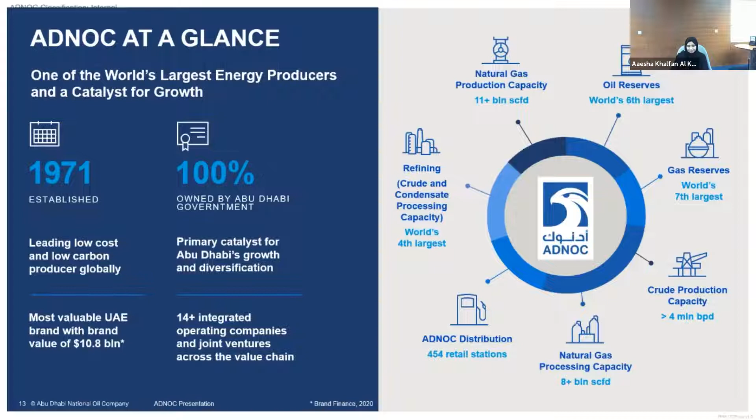So our strategic pillars in ADNOC are people, profitability, and sustainability. So let's talk more about sustainability. In ADNOC we have committed to protect the environment since our operation started back in 1971. So sustainability is a key priority for ADNOC, reflecting the vision of the founding father of the United Arab Emirates, His Highness Sheikh Zayed bin Sultan Al Nahyan, who talked about the need for us to protect and preserve the environment for future generations.

And as per our 2030 sustainability strategy, we are reinforcing our long-standing commitment to environmental stewardship across different pillars and initiatives, such as climate emissions and energy, local environment, economic and social contribution, workforce diversity and development, health, safety and security, and business sustainability as well. And today we'll focus more on emissions.

And in order to mitigate the risk of climate change, we have committed to reduce our greenhouse gas emission intensity by 25%. And this will strengthen our position as one of the least carbon-intensive oil and gas producers in the world. And in ADNOC, we have different initiatives in order to achieve this target. And we are also leveraging technology which will help us to minimize the environmental impact. And we believe that CCUS is one of the key innovative solutions which will help us to mitigate climate change while meeting the global energy demand.

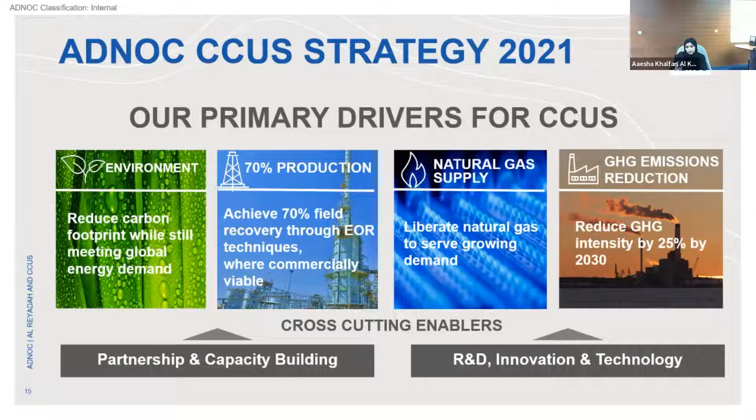And here we are really proud to have Reyadah as one of the top global facilities located here in Abu Dhabi, where this project is the first fully commercial CO2 capture from the iron and steel industry worldwide. And we started this project back in 2016, and we inject the CO2 in our fields, which is the largest CO2 project in the region. And it was successfully operated without any HSE issues.

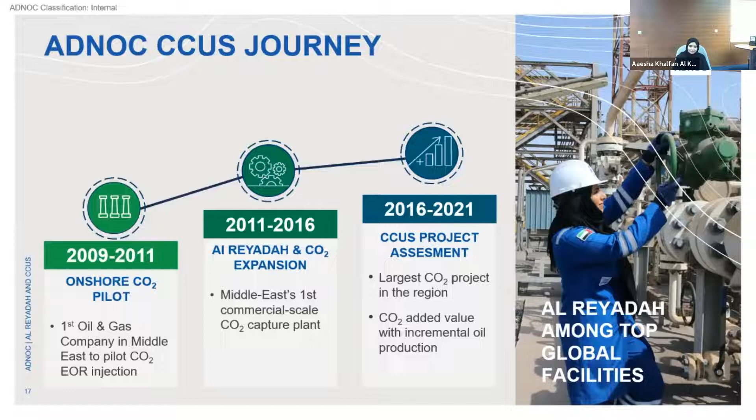So in the upcoming years, ADNOC momentum and investment will continue as per our plan to have different CO2 technology breakthroughs and a partnership strategy. Our priority now is to focus on development of the latest CO2 techniques, which will help us in the end to have an economically viable project and will enable us to optimize the whole cost of the CO2 value chain. And we have a CO2 deployment strategy, and we developed a CO2 master plan and roadmap, which will help us to establish the CO2 value chain, supporting low carbon ammonia and hydrogen. And this supports our strategy in the end.

And we believe in ADNOC that this will be like a game changer in the energy transition. Also, we are developing on top of the classical application different CO2 innovative cost-effective technologies with an EOR application. So this will be the first industry hybrid concept, which will maximize the CO2 added value with the chemical application. And it's expected to deliver higher value for ADNOC business.

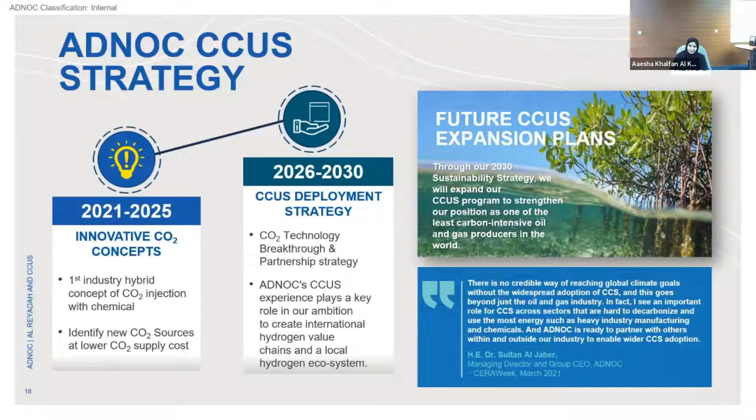Also, we are looking to identify new CO2 sources at a lower cost of supply. And we are doing the screening for different potential sources. And we plan to expand our CCS facility operation by capturing this CO2 from different sources. And now I would like to share with you a video presenting our efforts in this domain. So next, please, which is focusing more about Reyadah, which is our successful story.

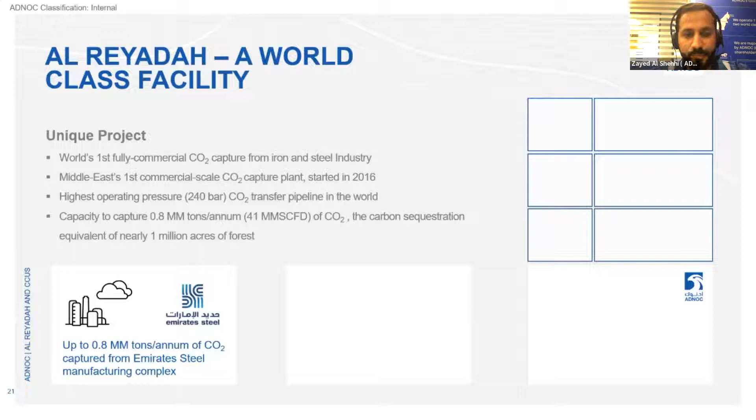This slide illustrates the entire value chain of Reyadah. So it starts with capturing of the CO2 there at Emirates Steel. So instead of being vented to the atmosphere, the wet CO2 would be brought to Reyadah for compression and dehydration purposes. Now our facility consists of the LP compressor and also the HP compressor.

So we are receiving the CO2 at almost atmospheric pressure, and then it will be compressed all the way to 240 bar. Now the final product would be metered, and of course we'll do the quality check, and it's going to be exported through a 43 kilometer pipeline for the enhanced oil recovery in Rumaitha field first, and then in Bab. Next, please.

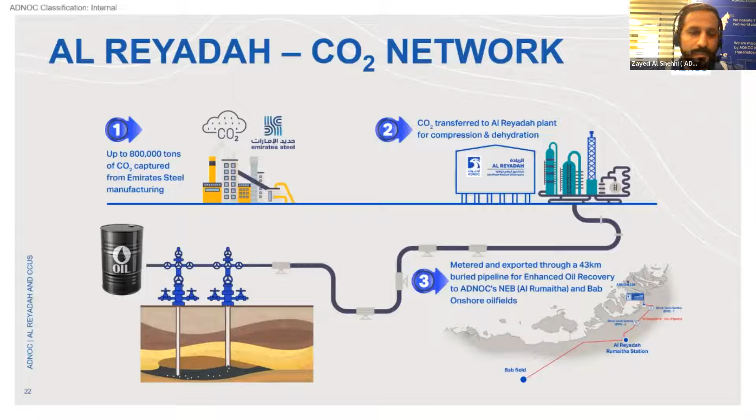This basically illustrates the geographical representation of our location and also our operations. As you can see, we are located in Abu Dhabi in between Emirates Steel plants. We have 1 and 2, which are basically the CO2 suppliers.

You can see our export line, which is represented in red. Our line is equipped with two block valve stations. These block valve stations are basically used from a maintenance point of view, and also to be used in case of any emergency. Now, from what you see, the first injection field will be in Rumaitha, which is exactly 43 kilometers from our location. And we are also injecting in Bab, which is currently about 120 kilometers from our location.

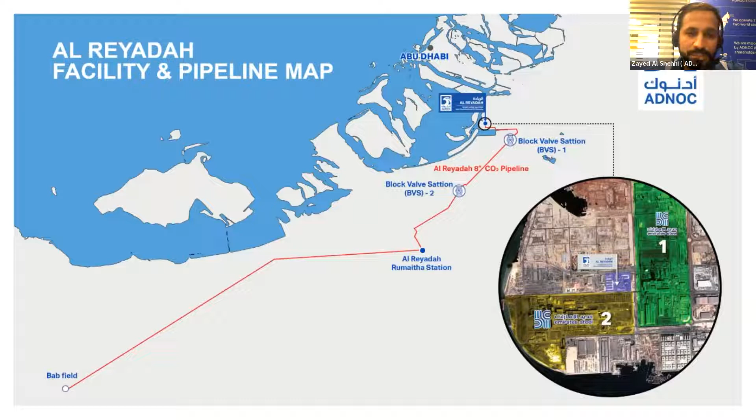As you have seen by now, Reyadah holds a very important role to realize our sustainability ambitions. And we believe that staying committed and being progressive will help us to navigate through the successful journey of transformation. With this, I conclude my presentation, and if you have any questions, please feel free to ask.

Great. Thank you, Zayed. Thank you, Aisha, very much for those informative presentations. There are several questions that are coming through as well. And I want to start with one of the comments, and both of you can come on video as well if you're able to.

In her presentation, Aisha indicated that natural gas would be liberated to the market. And so I think that's part of the business case for CCS in this case. And we know that for some governments and industries, the cost of CCS is a major consideration. So Aisha, let's start with you. Can you tell us more about the business case for CCUS in Abu Dhabi?

Yeah, so basically, as you highlighted, there are many drivers behind this: to avail the gas, which will be used in our network. It's one of ADNOC's gas self-sufficiency strategy. And also for production, as CO2 is considered an enhanced oil recovery method, which will help us to achieve our targets in terms of production.